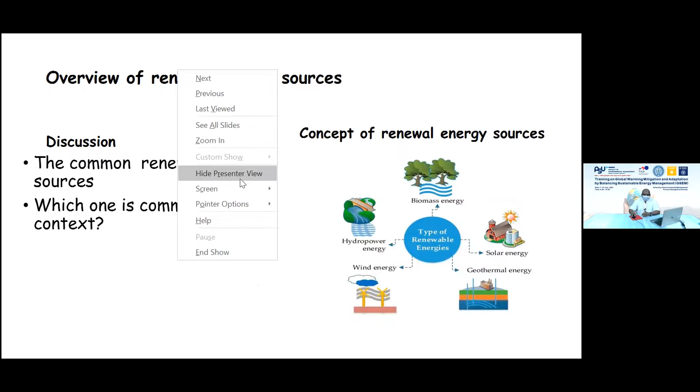Particularly, we will be talking about biomass energy here. Basically, in a broader sense, what we have as renewable energy sources are biomass, solar energy, geothermal, wind, and hydropower. There are other conventional ones that just belong into either of these. But in a nutshell, these are the common ones, just to refresh our mind. Our focus is talking about biomass.

Now, biomass - the concept of biomass is around this. The different biomass sources by concept actually cover, when you think of biomass, when you are talking about biomass, you are actually referring to one or all of this that makes up the concept of biomass.

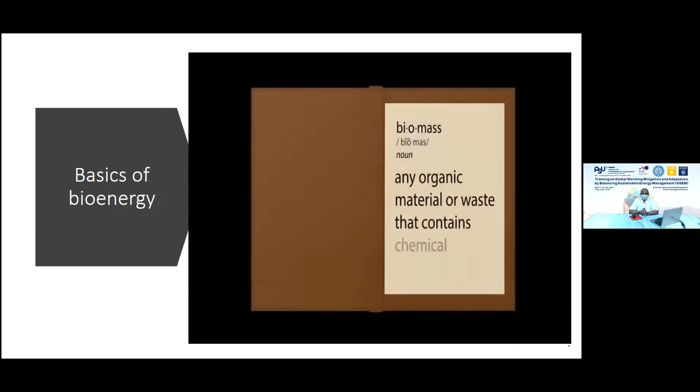Biomass sounds complicated, but really it's simple. Biomass can be defined as any organic material or waste that contains chemical building blocks like carbon, hydrogen, and other components vital to our modern energy and materials economy. Biomass is the single largest supply of carbon on planet Earth and is a sustainable, renewable source for products currently made from petroleum. Here's how it goes from waste to watts: trees and plants absorb energy from the sun through photosynthesis.

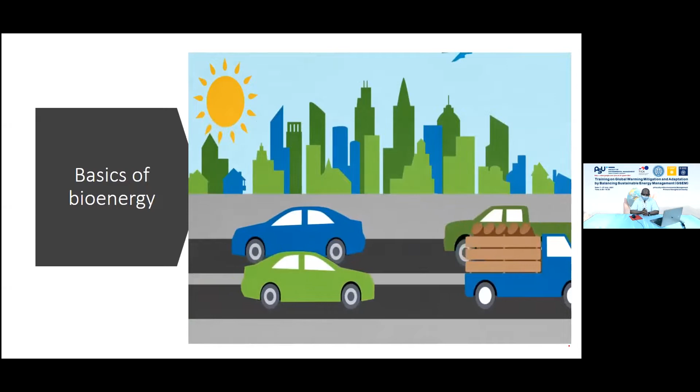There are several ways to convert biomass into usable energy. It can even be turned into fuels to power cars, trucks, and airplanes. To make fuels, wood is converted first to an intermediary gas or liquid that can be upgraded to make a final product such as gasoline, diesel, and jet fuel. It's almost like putting a tree trunk in your gasoline tank.

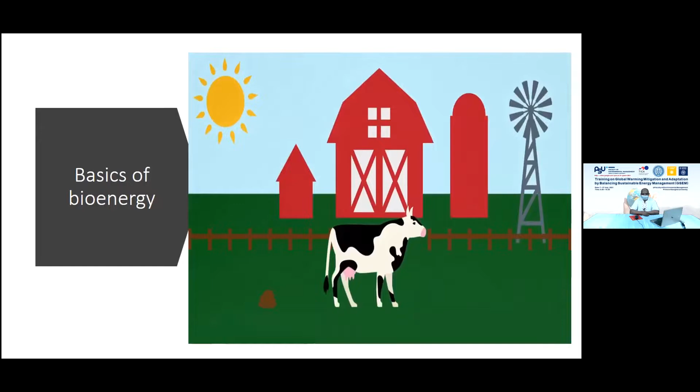Biomass also includes wastes - there are processes that work for many types of waste biomass, like animal waste. That's right, poop - believe it or not, poop can be used to make electricity. Manure from farm animals, mostly cows, is put into a big tank called a digester. Like your own gut, a digester has bacteria that eats waste and turns it into methane gas. The methane is burned to heat water, the hot water produces steam, the steam creates pressure that spins a rotor inside a turbine, and the turbine powers a generator, which produces electricity.

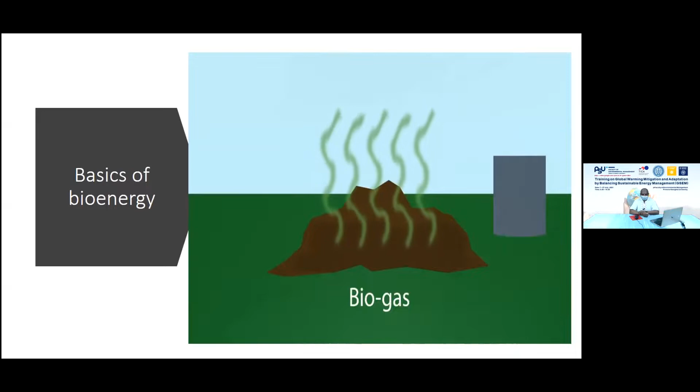That's it. Methane can also be captured from landfills. When biomass decomposes, it emits a gaseous product called biogas, which is rich in methane. After some cleanup and upgrading, the methane gas can be captured and burned in the same process to make electricity or to heat your home and cook your food. Biomass can also be used to make products like polymers and plastics made from renewable sources of carbon that are either recyclable or biodegradable - this will help solve the problem of plastic waste. Yes, biomass isn't so glamorous, but it is a clean, renewable source of energy and materials essential to our modern society. Who knew waste could be a powerhouse?

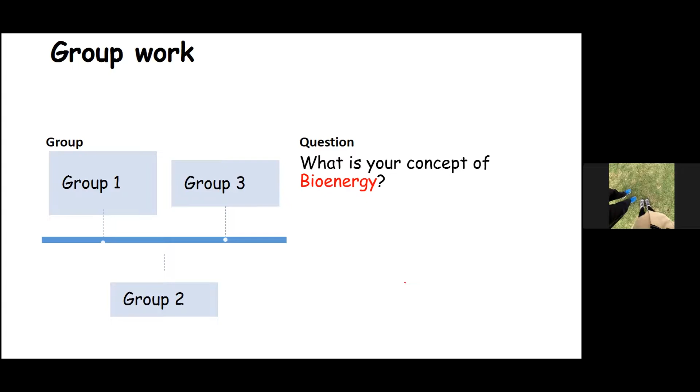Yes, from my understanding, from my practice and my work, sir, I understand bioenergy simply as energy produced from highly carbonaceous material, and when these highly carbonaceous components have already degraded, the output can be any gas like methane. This can be used to power any mechanism to produce energy like heat or steam. Okay, that's all right.

Thank you very much. The second concept I want us to discuss—because putting this together will help us know and connect a lot of things about biomass and energy—is, how about biofuels? What's your own concept of biofuels?

Biofuels? Hello? Sir, biofuels will be things like ethanol and stuff we produce from sugarcane.

Okay, for clarification, whatever fuel—when we talk about biofuel, we're talking about the product or produce from the bioenergy in terms of the waste. When you see waste, or see an animal in Guyana defecate or mess with the waste from an animal, you look at it as something scornful, something you shouldn't be around. Whereas that is something that could actually be used to produce a form of bioenergy. The product from that I would consider, and I might be open on this, to fall under the biofuel category to an extent.

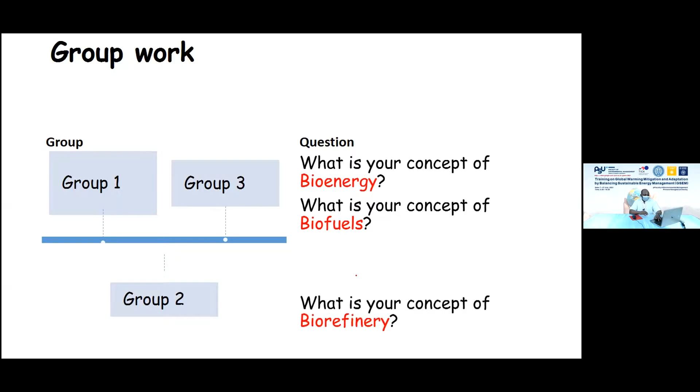Okay, and then thirdly, we want to talk about this. How about this? Yep, who is there? Anybody there? Biorefinery. Somebody is saying, wow, what about that? Hello? Yes sir, yes, yeah.

I think biorefinery is a place or a process to produce bioenergy. It can be from biofuel, maybe, and the byproducts integrated in one place. Oh, great, integrated in one place. Thank you, that is the keyword there.

Yes, anybody? Yes sir, this is Emeline. Okay, Emeline from the Philippines. Biorefinery is a facility where there is conversion of biomass into energy. It's just a facility for this energy conversion.

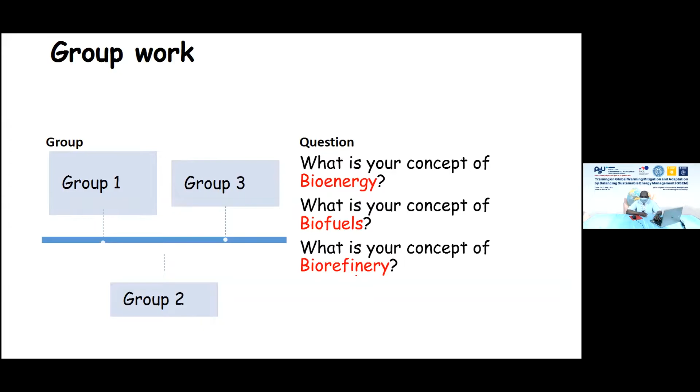Yeah, that is that. Can we have another person? Anybody with a different perception, not contrary? Anybody? Okay, let's move on from here.

Actually, this is what we are to do. From all that they said, submissions from Michael, Emmeline, and other people, I want to know from their submission who you think is wrong. Who was wrong? No one. What do you mean? There is no one wrong. In this scenario, it's just how we see it, right?

So there is no cause for us to be arguing that this is this and that is that. It's just the way it appeared to you. There is always a meeting point, always a common ground and a base for all our perceptions.

Among these people, who is wrong? Anybody wrong? Okay, so in reality, reality can be so complex that equally valid observations from different perspectives can appear to be contradictory. That is how life is. This is just to energize us and let us know that your opinion or perception should be respected, and others should be respected too, depending on where they are standing, their direction, and whatever, in life generally.

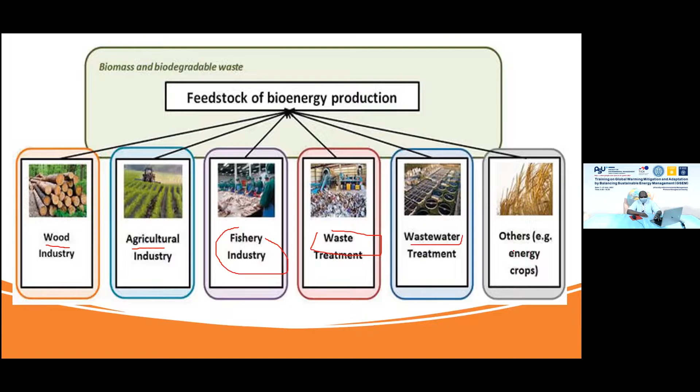And there are some specific crops they call energy crops. Naturally, they have been made to conserve energy in many of their storing parts, and they are specifically referred to as energy crops. Okay, this is where we get our feedstock from.

We've already discussed these things, so this is just a review. Talking about biofuels, to some, it's simply fuel from biomass, whatever you consider fuel to be. The one you get from biomass is a biofuel. Another school of thought says it's a fuel produced through a contemporary process from biomass.

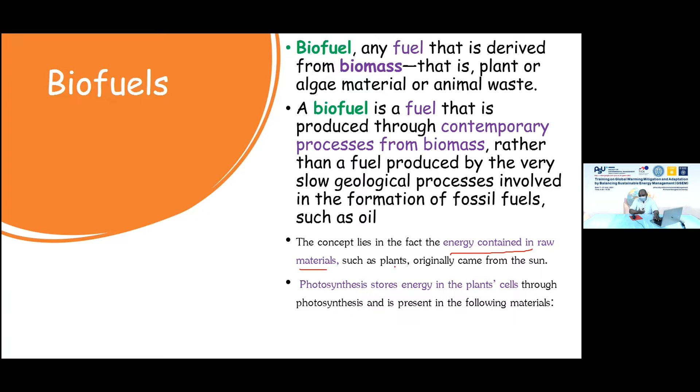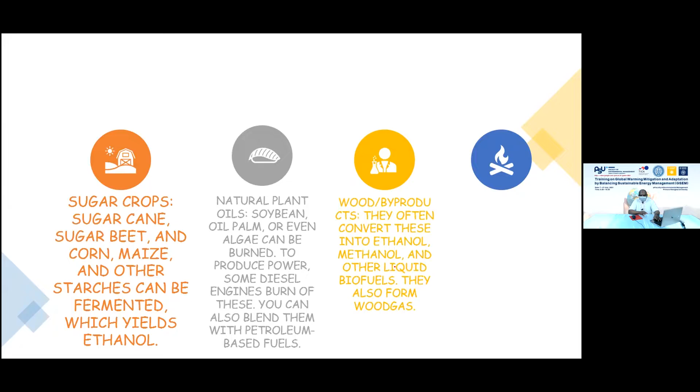So these are different sources of biofuels. Sugar crops - sugar cane, sugar beet, corn, maize, and other starches - can be fermented into ethanol. Oil seeds, oil plants, and oil crops can also be burned to produce power; some diesel engines burn through this. And wood is also a kind of source of biofuel.

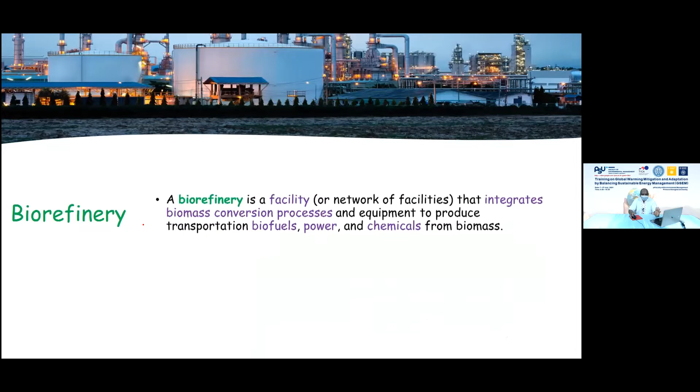Biorefinery, on the other hand - I'll quickly run through this, as someone already mentioned it in our class. A biorefinery is a facility that integrates biomass conversion processes to produce fuels, power, and chemicals.

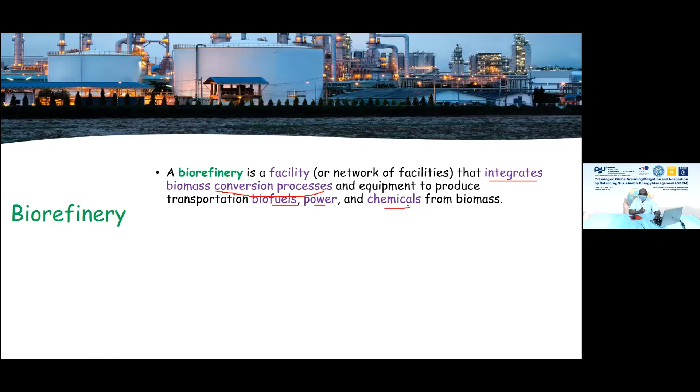The main concept of a biorefinery is just like a petroleum refinery. Some of us are familiar with what happens in a petroleum refinery, where a range of products are produced - the same principle happens in a biorefinery.

According to the International Energy Agency, a biorefinery is sustainable biomass processing. We've already discussed what sustainability is about in previous sessions when defining sustainable development. So in this case, it's sustainable biomass processing that yields a range of products, not only energy-related ones but also biomaterials - a broader picture of what a biorefinery can be, along with the bioenergy products we've already mentioned.

So that is that about a biorefinery at that point, but then in a follow-up, this is what it means.

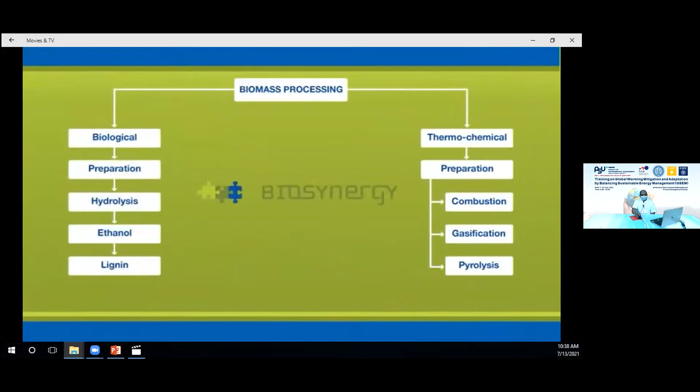There are two main routes when it comes to processing biomass, either biological or thermochemical. These processes are at the core of the Biosynergy project, which the European Commission has sponsored. The biological process firstly involves pre-treatment, in which the biomass is received, handled, stored, dried, and reduced in size.

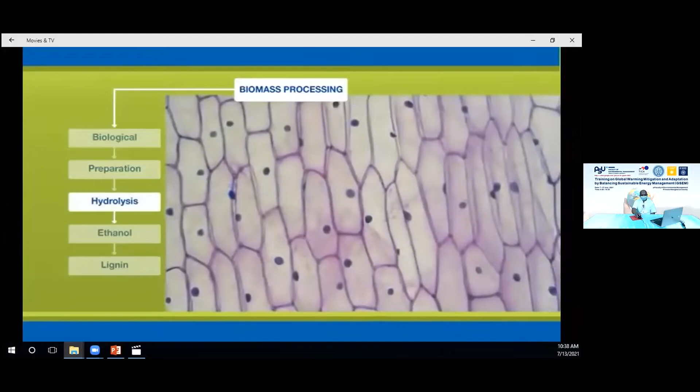Next, hemicellulose and cellulose are converted by a process of hydrolysis using acid or enzymes. This creates sugars, which are fermented to produce a dilute product from which ethanol is separated. The ethanol produced can then be used as a fuel in its own right, a fuel additive, an industrial solvent, or processed as a petrochemical to produce other specialty and commodity chemicals, which can be used to make a wide range of consumer products. A byproduct of hydrolysis is lignin, which is used in the production of transport fuels and specialty and commodity chemicals.

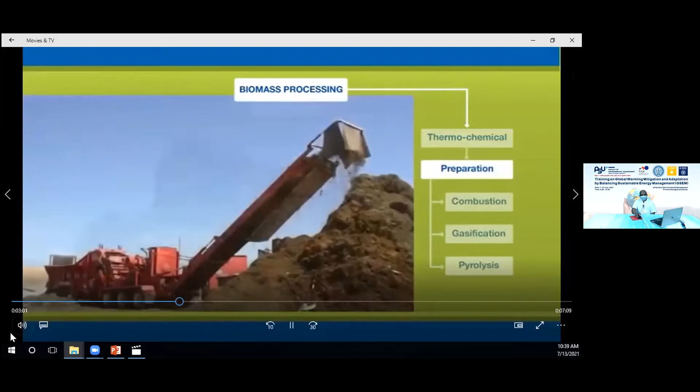The thermochemical processing is different in that high temperatures are involved, but again involves pre-treatment in which the biomass is received, handled, stored, dried, and reduced in size. It then goes through one of three different types of thermochemical processing: combustion, gasification, or pyrolysis. Combustion is used to generate heat, which produces steam, and this in turn drives turbines to generate power.

Gasification turns biomass into fuel gas or synthesis gas. Fuel gas is used to generate power and heating, while synthesis gas is used to manufacture synthetic transport fuels and bulk chemicals, which can then be refined to produce specialty chemicals, such as polymers used in the manufacture of consumer goods.

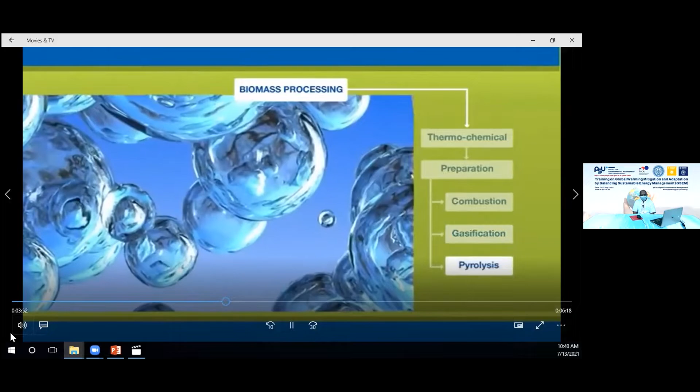Pyrolysis encompasses a number of varying processes. Fast pyrolysis produces high yields of a high-energy liquid that is cost-efficient to handle and transport. This can be used directly for heat and power, or to produce chemicals such as adhesive resins for wood panels. It can also be processed further by gasification.

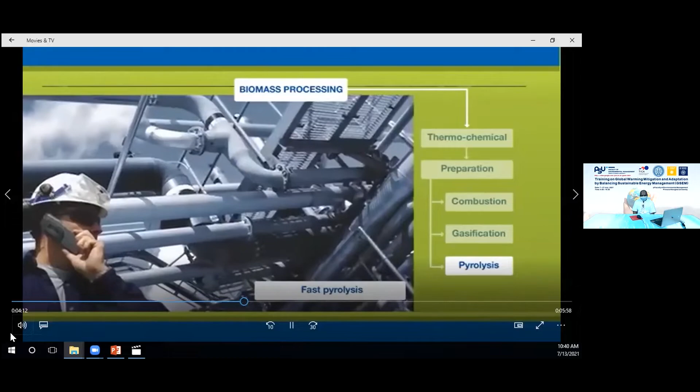Low-temperature pyrolysis, or torrefaction, also prepares biomass for gasification and improves its quality. Various other forms of pyrolysis, intermediate and slow pyrolysis, also produce gas, liquids and solid that can be used in analogous applications such as acetic acid.

So, what do these conversion and upgrading processes actually produce? For a start, they produce heat and power, either for industrial and domestic use, or for use in the biomass conversion and upgrading processes.

Secondly, they produce transport fuels, either by blending bioethanol with fuel, or using it as a fuel in its own right, or by using hydrocarbons to produce synthetic diesel and gasoline. Thirdly, they produce specialty and commodity chemicals which can be used to manufacture a wide range of products for use in industry and ultimately in consumer goods.

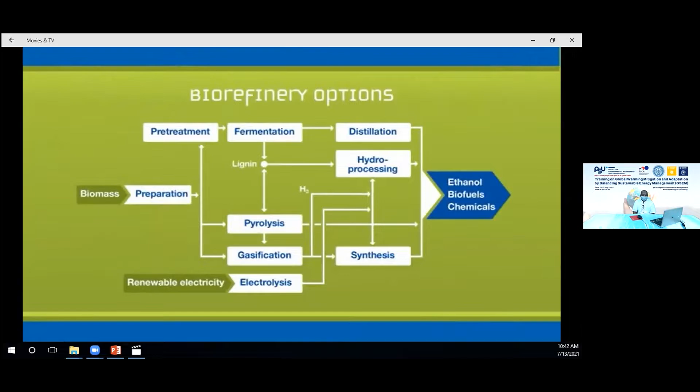It's essential that we get the most effective output from processing biomass. And to achieve this, we need to look at integrating the biomass processes in order to optimize the range of products they generate. In essence, this means developing integrated biorefineries capable of producing a similar range of products to those produced by conventional petrochemical refineries.

The concepts we develop for biorefineries also need to be as cost competitive as possible, and this can be achieved by using as much of the biomass as possible. One aim is a design for an integrated lignocellulose biorefinery based on the straw-based bioethanol demonstration plant of Abengoa Bioenergy in Salamanca, Spain. An example is provided in this diagram.

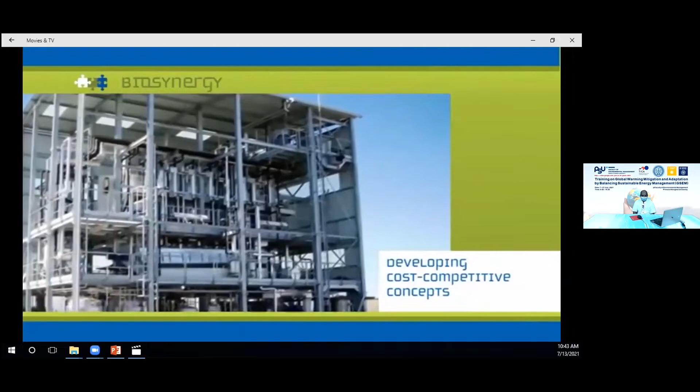At present, we are evaluating 5 different methods of straw pre-treatment for the production of fermentable sugars, each differing in performance and cost. The optimal process will depend on the processing destination of the fractions and the envisaged end products.

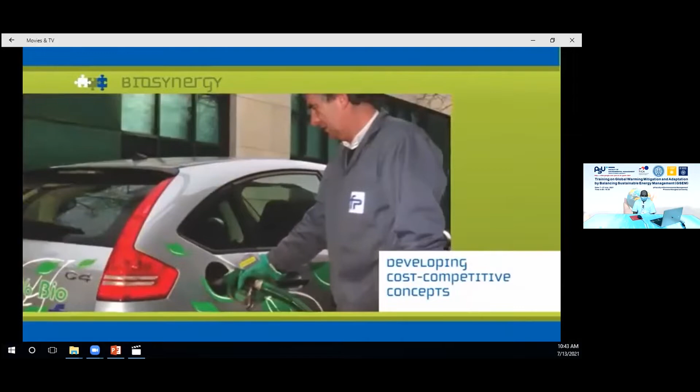As well as producing ethanol by fermentation, we are also investigating other biochemical processes that produce acetone, butanol, and other platform chemicals. Another idea is the development of thermochemical conversion integrated with separation technologies.

For example, thermal conversion by gasification produces synthesis gas, which can be converted into ethanol, methanol, diesel, and gasoline. Thermal conversion by pyrolysis produces a liquid oil, which can be used as an energy carrier that can be upgraded into refinery feedstock material for the production of transport fuels, and can be used as a source of commodity and specialty chemicals.

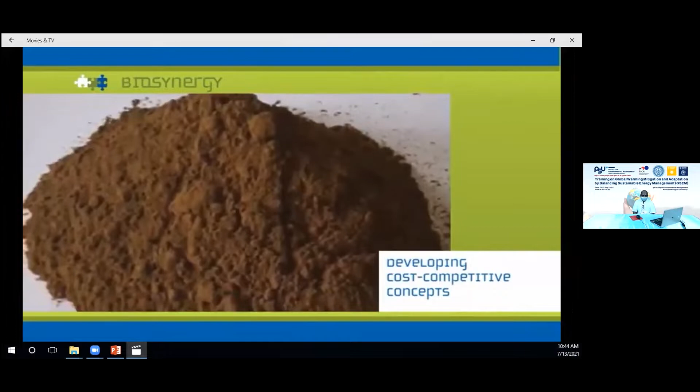A key byproduct from bioethanol production is lignin, and we are investigating this as a feedstock for resins and phenol for polymer synthesis, while potential chemicals from the hemicellulose fraction include surfactants and furfural.

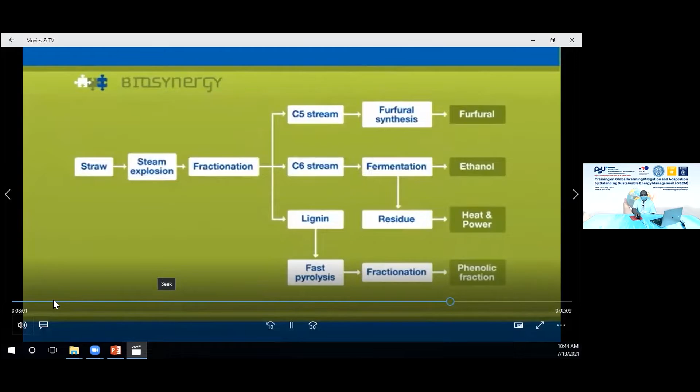At present, we are evaluating all these process concepts in order to identify the most promising biorefinery chains in terms of performance, energy efficiency, environmental performance, cost, and socio-economic contributions. This will entail several of the best performing biorefinery processes being tested at pilot plant scale.

It all sounds workable. But there are a number of challenges ahead if we are to seriously consider biomass as a sustainable energy source for the future.

For example, where do we source biomass without damaging local economies and areas set aside for food production and feedstock? How do we reduce processing costs? And how do we integrate products into the supply chain and get them to consumers?

How do we go about producing multiple products, making the whole process more cost efficient? And what is the overall life cycle impact, taking into account use of land, cost of processing, the carbon footprint, and the socio-economic benefits?

These are the challenges Biosynergy needs to overcome if we are to optimize the range of products that can be derived from a biorefinery and provide future generations with a viable and sustainable biomass resource.

The Biosynergy Consortium consists of 17 complementary partners with a high level of expertise.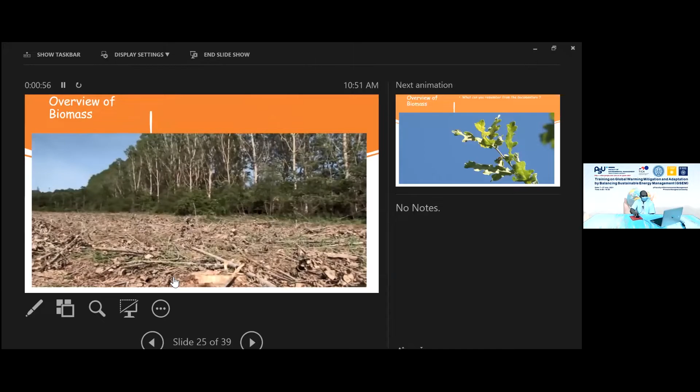Biomass is essential to human beings. For thousands of years, people have used biomass as a source of energy.

In the 20th century, oil has made life easier. But the negative side is that nature, or the environment, is seriously affected.

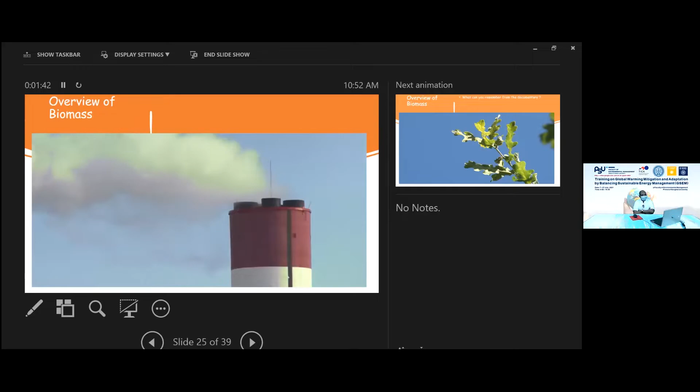Would the solution today consist in reverting back to basic energies, such as the sun and biomass? And if we do this, what would the cost be?

Recent technologies can convert biomass into hydrocarbon within a few hours. The willingness to change is therefore mainly a matter of commitment.

To what extent can biomass replace fossil fuels? What are the benefits for the environment, for society, for climate change?

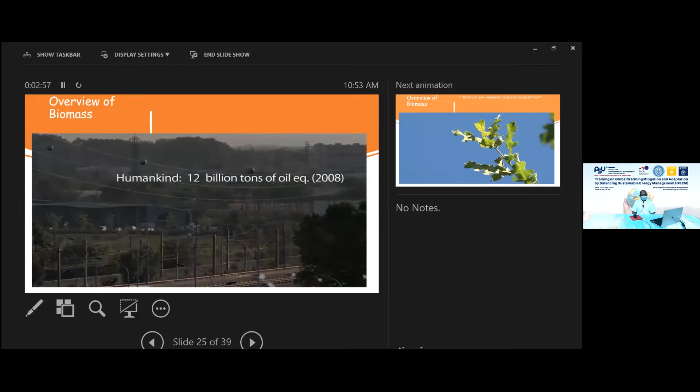In one year, humankind consumes the equivalent of 12 billion tons of oil. In one year, the solar energy received by the Earth is equivalent to 90,000 billion tons of oil, and the energy stored in biomass growth amounts to 72 billion tons. All the energy needs of humankind in a year could be met by collecting an hour of sunlight, or one sixth of the biomass production. Yet renewable energies only account for 13% of the global energy package, which is dominated by non-renewable energies: oil, coal, gas, and nuclear power. Biomass is number one, far ahead of hydropower, wind, solar energy, geothermal, and tidal power together.

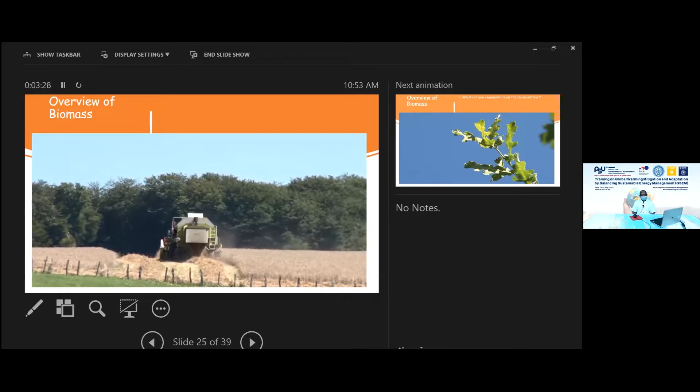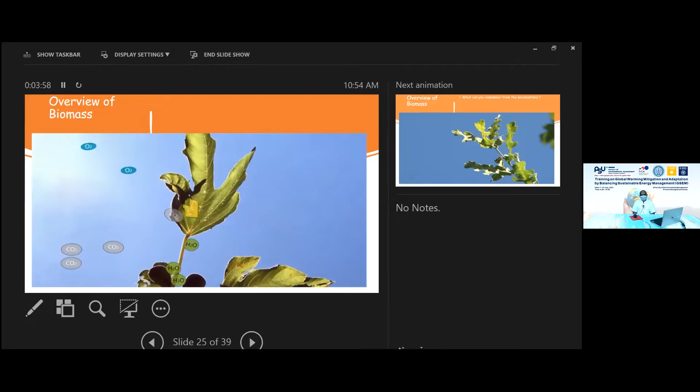Biomass, which is at the beginning of the food chain, is also at the beginning of the energy chain. Photosynthesis is a biological process that enables plants to synthesize their own organic matter from atmospheric carbon dioxide, CO2, and water. Photosynthesis mainly produces sugars. For example, 6 CO2 molecules and 6 water molecules are needed to produce 1 molecule of glucose. The reaction also produces 6 molecules of oxygen.

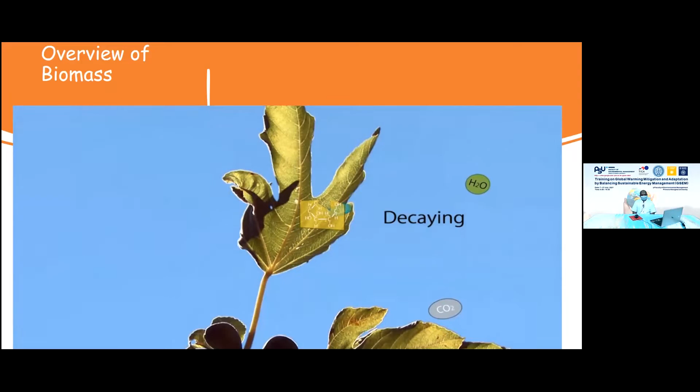CO2, mainly responsible for the greenhouse effect, is thus trapped in solid form within the organic matter, except for the loss in organic matter due to breathing. Growth only occurs if the amount of organic matter produced by photosynthesis exceeds the amount needed for breathing. At night, only breathing takes place. Lastly, plant decay in the open air obeys the same law as that of breathing.

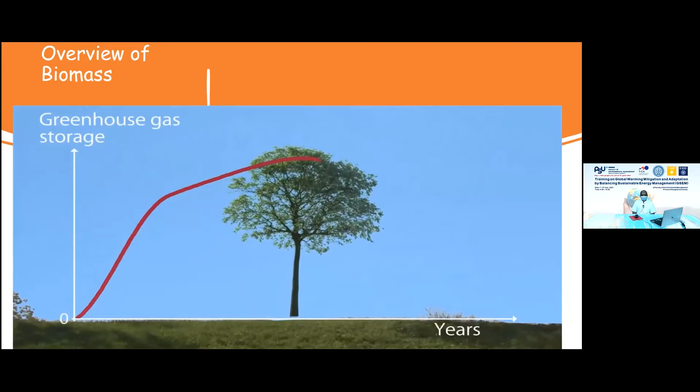Now let's have a look at the life cycle of a tree. The young tree stores more and more carbon. As it grows older, its breathing catches up with its synthesis of organic matter. Consequently, carbon storage declines. The tree dies. As it decomposes, it releases all the carbon it will have stored in its lifetime. It is therefore a carbon sink and a source of carbon. Over its whole life, the net result is zero.

The tree has stored or produced no carbon, and it has not stored or produced oxygen either. In order to limit the greenhouse effect by stocking a maximum amount of carbon, there is thus an optimum age at which the tree should be cut down and replaced with a sapling.

If the tree is burned instead of being allowed to decay, we find the same result, but the reaction is faster. If this decay takes place in the absence of oxygen, for instance in a rainforest swamp, the tree will produce methane. Methane is a much more powerful greenhouse gas than CO2. So in its whole life cycle, the impact of this tree will have been negative because it has produced greenhouse gases.

By playing a part in natural systems, humankind can therefore control the reabsorption of atmospheric CO2 and limit the emission of greenhouse gases.

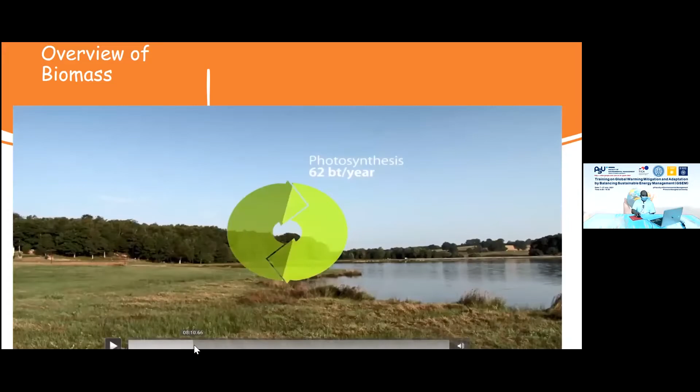Not included in official statistics, on a global scale, the carbon flow stocked by biomass is about 62 billion tons a year. This carbon is considered as circulating because a major part of it goes back into the atmosphere due to the decay of biomass. Photosynthesis is the driving force of this carbon cycle.

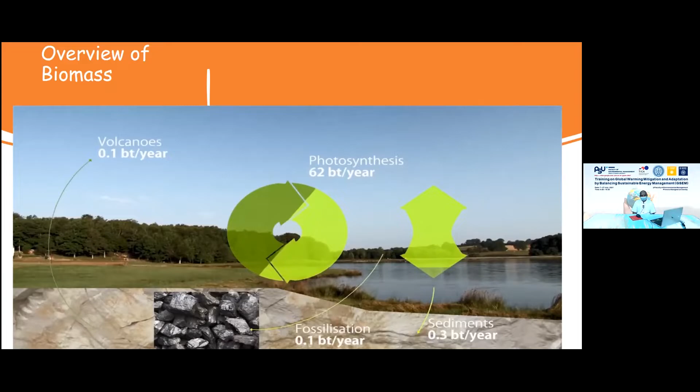Related to this main cycle, there are other lesser ones. Atmospheric carbon is in balance with the carbon dissolved in water. Part of this dissolved carbon sediments, while sedimentary limestone is burned by volcanoes and returns to the atmosphere. Finally, a tiny fraction of biomass will be gradually fossilized, but it will require millions of years for this biomass to be turned into coal, oil, and natural gas.

From the industrial era onwards, in the 1850s, human beings began to draw from fossil fuels. The burning of these resources provoked additional CO2 emission into the atmosphere. Deforestation and the use of limestone, for example for the manufacturing of cement, also generate CO2 emission into the atmosphere. Humankind thus releases a new source of CO2 called anthropogenic CO2.

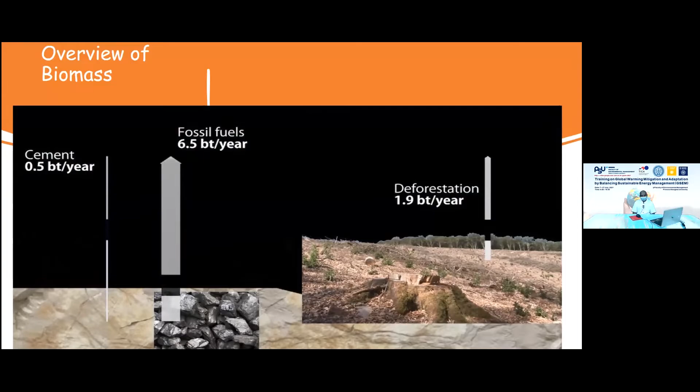This flow of carbon released into the atmosphere brings about an imbalance because it is too large to be absorbed by natural phenomena. Thus, the concentration of atmospheric carbon that had been stable for years has been increasing since the first industrial revolution. This has increased and continues to increase the greenhouse effect.

By capturing and releasing CO2, the plant creates a flow of carbon. The whole biomass is a stock of carbon. The flow and the stock are related. On Earth, the carbon stock is divided between 4 reservoirs.

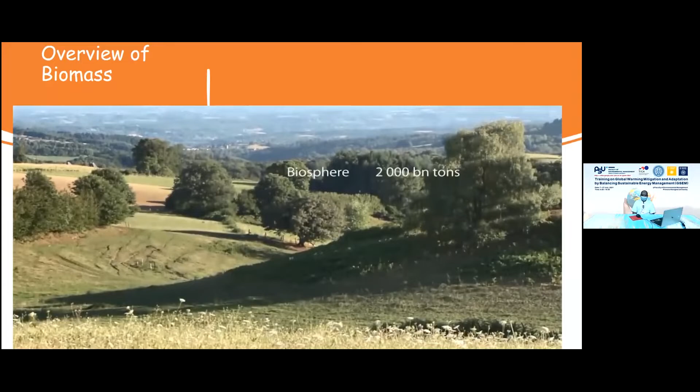The atmosphere: 750 billion tons of carbon, mainly in the form of carbon dioxide. The biosphere, which represents the organic carbon of biomass: one quarter of it is alive, and three quarters is dead or decaying. The hydrosphere, water, contains dissolved carbon. The lithosphere, the underground rocks, contains most of the carbon as a mineral.

There are rocks of organic origin—coal, oil, and natural gas—called fossil fuels, all created by the fossilization of biomass. There are also limestone rocks, formed by the sedimentation of shells and the precipitation of dissolved carbon. The amount of carbon that can still be released into the atmosphere is enormous.

Populations are not equal with respect to their energy consumption. There are large consumers, who consume 10 times more than small consumers, and there are average consumers. Of course, the larger consumers could consume less, but they are very few.

In fact, areas where energy consumption per person is the lowest are the most populated, have the strongest population growth, and have the highest increase in energy consumption. But these consumers consume so little that it is difficult to ask them to consume less. So even with a balanced consumption of around 2.2 tons of oil per person per year, more energy will have to be produced, all the more so as the world population keeps increasing.

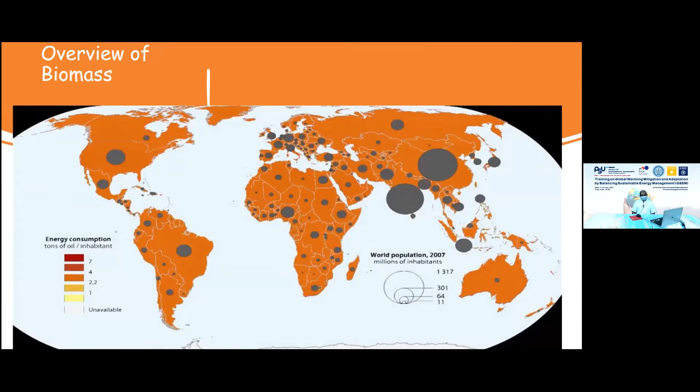In order to achieve sustainable energy consumption, energy production should not resort to using energy stocks, but to using energy flows. We should no longer draw on fossil fuels or trees, but capture rather solar energy, wind energy, or the flow of biomass production instead. We must use energies that are able to be renewed as fast as we consume them, that is, renewable energies.

The use of biomass consists in diverting part of the cyclic carbon towards human activity. Once consumed, this carbon returns to the cycle it would have had if humans had not intervened, that is to say, there is no further emission into the atmosphere. On the contrary, what is taken from the biomass saves fossil fuels and accordingly reduces emission into the atmosphere.

But biomass production, transformation, and transportation have an energy cost. The economy in greenhouse gas should then be calculated over the entire cycle. Shortened circuits that already exist in the food economy also have a part to play in energy production.

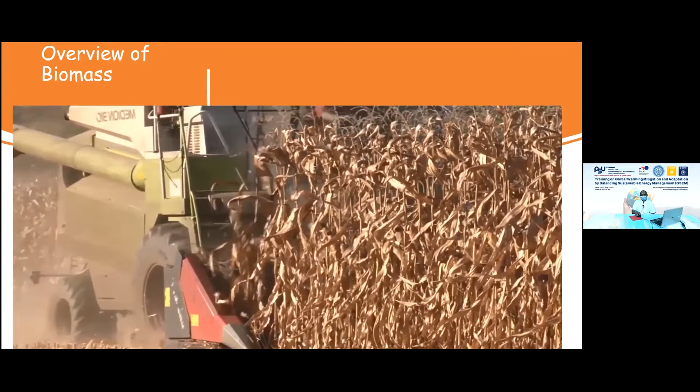Before 2008, easily transformable substrates were used, often foodstuff, sugar and vegetable oil, in order to obtain ethanol and methyl esters. These were the first-generation biofuels. In 2008, the food shortage broke out. It emphasized the awareness that non-food biomass should be used to produce biofuels.

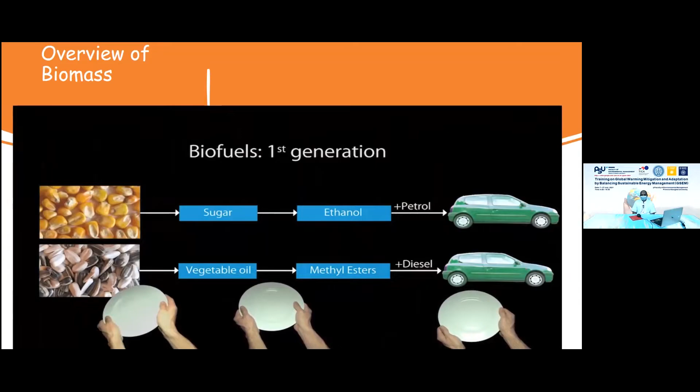These were the second-generation biofuels. The second-generation biofuels used lignocellulose as a raw material. Lignocellulose is the main component of plants. Its transformation thus enables us to use entire plants rather than storage organs alone.

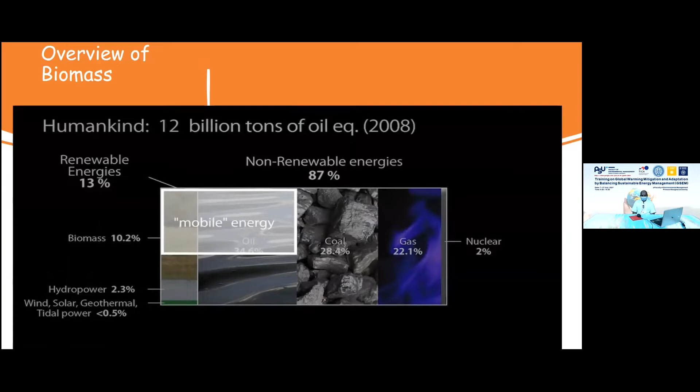The nature of the energy produced depends on the use we want to make of it. We distinguish static use from mobile use. Static use energy is consumed in a fixed place. Mobile use energy is employed to move vehicles. Only a third of the energy is used for mobile use, but it is the most problematic energy because it has to be carried within the vehicle. The main constraint is to go far with a low volume of fuel.

A lot of renewable energy is produced in the form of heat and electricity. It is difficult to store heat and electricity. Therefore, they are mainly used for static use. The characteristic of biomass is that it is available in a material form, which gives it the advantage of being easily stored.

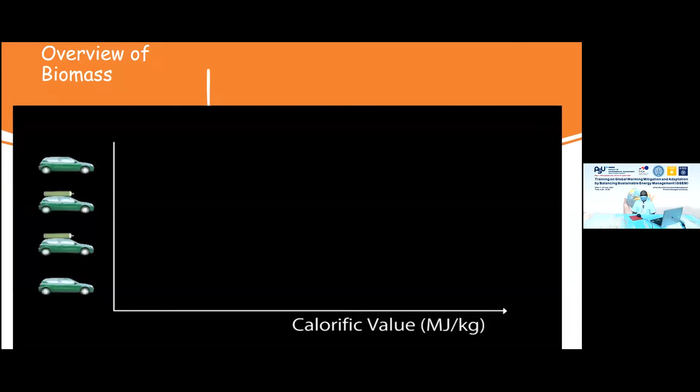Among the energies that can be easily stored, thus offering the strongest energy content, what we call calorific value, are preferable. The higher the calorific value is, the further we can go. Biomass, wood, has a low calorific value, 16 megajoules per kilo. Besides, the solid form of wood is ill-adapted to power an engine.

Gases are used as mobile use energy, methane and hydrogen. They have a very high energy content. But the storage of these gases is still cumbersome and eventually limits vehicle autonomy. Yet hydrogen would be an ideal fuel because its combustion does not release CO2. Enriched uranium has a calorific value of about 500,000 megajoules per kilo. A kilogram of uranium would allow a car to run 200,000 kilometers.

But in civilian life, the best adapted energy for mobility is thus in a liquid form. It is then called fuel, and biofuel when the resource is biosourced and not a fossil fuel. Liquid biofuels are already part of everyday life. Ethanol is mixed with petrol. Pure vegetable oil is also used.

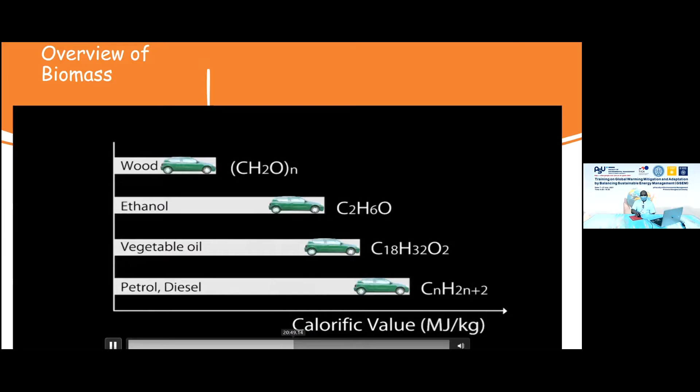But petrol and diesel, with a calorific value of 43 megajoules per kilo, surpasses all liquid fuels. The fuels with the highest calorific value contain the least oxidized molecules, i.e., those with the lowest proportions of oxygen. Petrol and diesel do not contain oxygen atoms, but only hydrogen and carbon atoms. They are hydrocarbons.

It has taken nature millions of years to produce hydrocarbons. Are we able to do that successfully in a few hours?

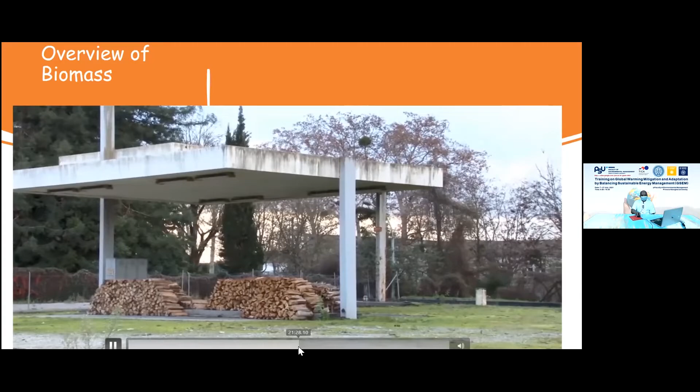Biomass is a complex entanglement of macromolecules. Thousands of glucose molecules are bound together in linear chains to form a molecule of cellulose. Cellulose forms cable-like filaments known as fibrils. Lignin is like a corset that stiffens the cellulose network and brings solidity and impermeability to vegetable cells.

Hemicellulose binds cellulose molecules and lignin. This structure makes biomass highly resistant.

This is the difficulty with second-generation biofuels: how can we deconstruct lignocellulose to obtain simple molecules that could be used by traditional chemistry? The stakes are of the utmost importance.

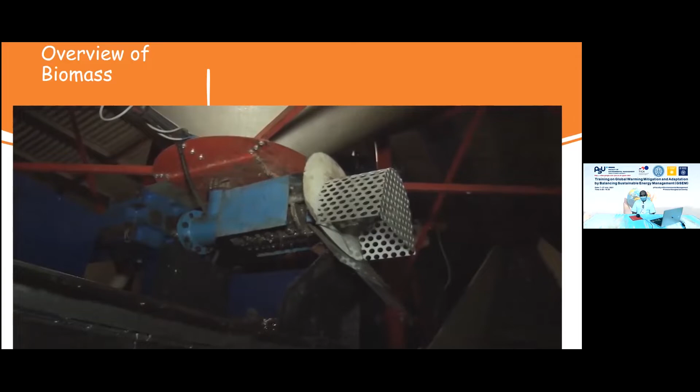In the first-generation processes, simple cold pressing would enable us to extract sugar or oil. The second-generation processes are far more complicated. We distinguish microbial methods from thermal methods.

After chemical treatment, the microbial methods use enzymes which selectively split up macromolecules into simple sugars. Among other things, we can collect the glucose molecules from the cellulose. The thermal methods, which are more drastic, pulverize all the lignocellulose macromolecules into simple molecules, hydrogen and carbon monoxide.

Nowadays, technologies have improved and allow us to use the byproducts of agriculture as well as the products and byproducts of forestry. This resource, rich in lignocellulose, led to the second-generation biofuels.

The cultivation of microalgae has led to third-generation biofuels. Microalgae produces sugars and oils with yields per hectare that could be 10 times as high as those of land crops. These techniques are quite recent, and their industrialization is still in progress.

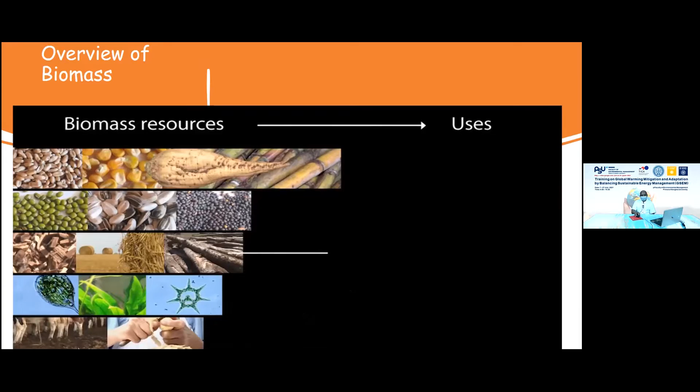Lastly, there is the issue of waste. Wet waste can be methanized to obtain biogas and provide gas, heat, and electricity for the energy networks. Dry residues, in the form of lignocellulose, enable us to produce biofuels. Burning wood allows us to proceed directly from the energy resource to the energy use, heat.

But generally, a transformation process is needed to convert the resource into a specific energy use. It is in the biorefineries that this transformation takes place. If we consider mobile use, the most favorable solutions of the moment are found in second-generation biofuels.

We estimate that, compared to fossil fuels, first-generation biofuels reduce greenhouse gases by 30%. Second-generation biofuels reduce them by between 70 to 90%. This reduced impact is because these resources already exist.

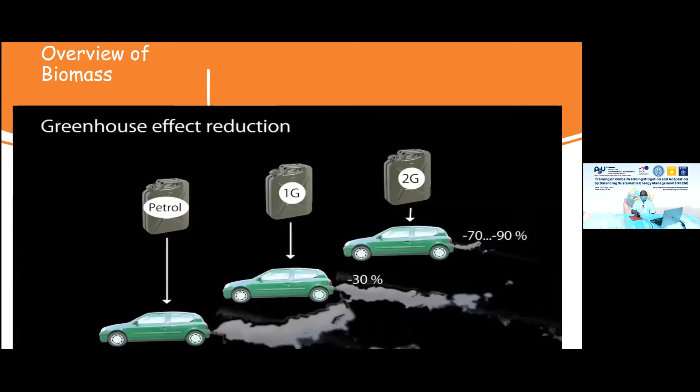Often, all we have to do is harvest them. But to launch an industry, raw materials must not only be available in sufficient quantity, but must also be sustainable. Is this the case?

Around the globe, land areas represent 14.9 billion hectares. 10% of this surface is occupied by farmland, 23% is pasture, 26% is forest. Everything else is desert or built-up areas. This means that biomass covers about 60% of the land.

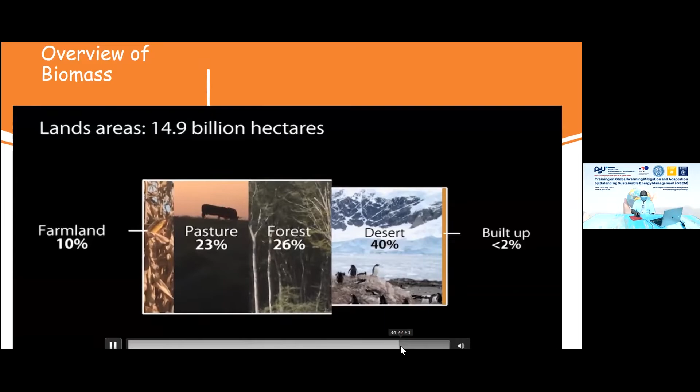Yet plants don't grow everywhere at the same speed. We can assess these differences by measuring the net primary production. It is the mass of organic matter synthesized per square meter and per year.

On land, organic matter develops 5 times faster in tropical areas than in temperate areas. The net primary production varies according to a series of factors, including light intensity, water, temperature, and the concentration of CO2. We could almost say that thanks to the CO2 released by humankind, plants grow faster.

Let's take the example of forests. They produce per hectare and per year 2 cubic meters in the far north, from 5 to 20 cubic meters in temperate and dry tropical areas, from 50 to 100 cubic meters in wet tropical areas.

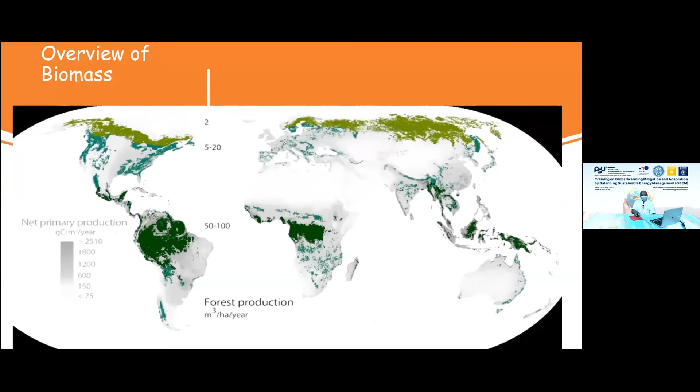Currently, the average rate of wood harvesting is 1 cubic meter per hectare per year. Let's imagine that we took 2 cubic meters instead of 1 cubic meter. This alone would correspond to 8% of humankind's energy consumption.

In particular, unused wood debris left to rot in forests already represents 60% of the available biomass. In the countries where forests are managed, they are expanding without fertilizer and without irrigation.

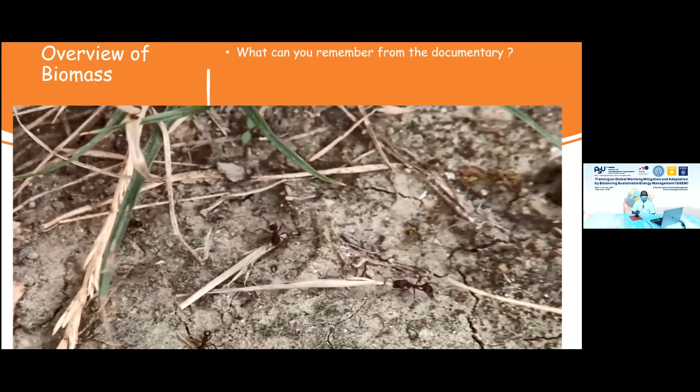Autonomy. The same is true for food autonomy. Solutions have to be found. Researchers are working on them. But it is a global social project that must be set in motion. We have to reconcile the natural advantages offered by the soil, climate, and location with biodiversity and employment. This is necessary to provide humankind with sustainable sources of food, material, and energy.

Okay. Yeah. Can you hear me there? Yes, sir. We've had a long watching and listening and all that. So please, for us to be able to grasp and get some things from what we've been hearing, can we respond to this quickly?

What can you remember from the documentaries about biomass energy and biofuels? In one word? Yes, please, go ahead. I just want to mention what is something new from the documentary.

Actually, I haven't had the idea about the life cycle of the tree in terms of carbon dioxide. It was new to me that it is better to cut the tree before it decays, when it gets older, so that the carbon dioxide won't be going back to the atmosphere.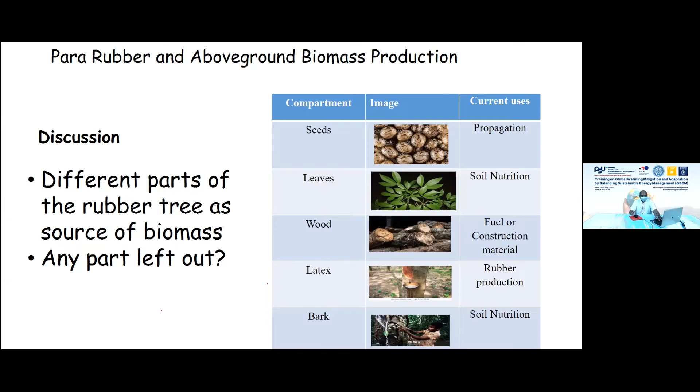But I will try to show us also a kind of prototype of what happens there, that energy can be generated from biomass. In this particular case, they use the rubber stump, the stump after the rubber tree has finished yielding latex around the age of 25 to 30 years old.

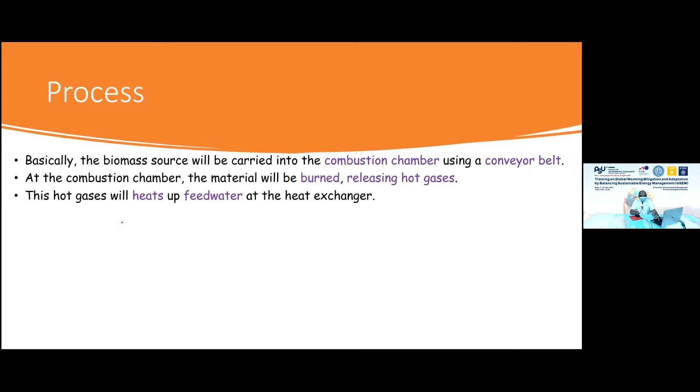So at the combustion chamber, what happens there? There is a burning of the stock, the feedstock, releasing hot gases. These gases now heat up the water, and then the gases will be treated before being released back into the air.

In their own case, they use a system called ESP to treat the gases being released from here, and other people utilize the ash after the burning in other construction materials, concrete mix, and all that. So they try to make the system in this plant sustainable and circular in nature.

Okay, eventually, the process involves energy changing from one form to another. So the solid gains some energy, it goes to liquid. From liquid, when there is more energy, the state of matter changes to gaseous. So when there is gaseous and with addition of energy, it goes to the plasma state.

So this is the same principle that works here. You feed in the solids, generating liquids, and then the liquids go into gaseous state. Then in the process, it comes into plasma in electrical form. So basically these are the main things.

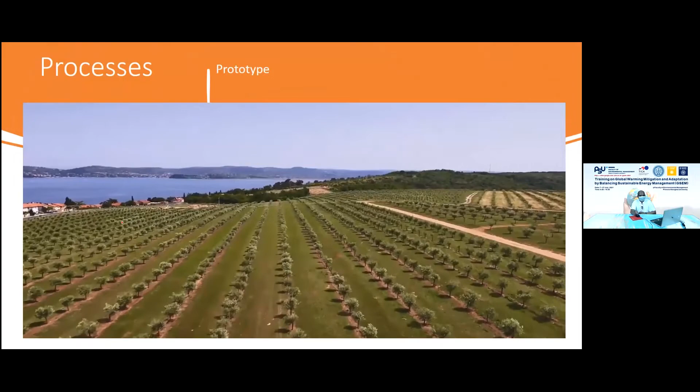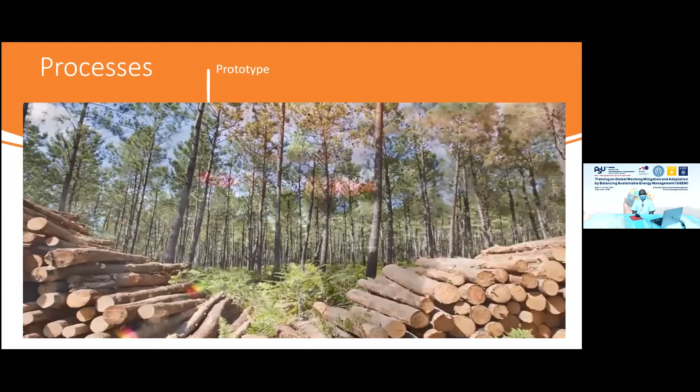A biomass power plant generates electricity using the heat generated by the combustion of organic materials, such as plant residues, household waste, and the biogas resulting from waste fermentation. All of these are renewable energy sources available in large quantities.

The fuel is brought to the boiler. It is then introduced into the combustion chamber where it releases heat as it burns. This in turn heats water in tubes that line the boiler. The hot water is then sent to a tank where it turns into steam. The steam drives a turbine which turns a generator.

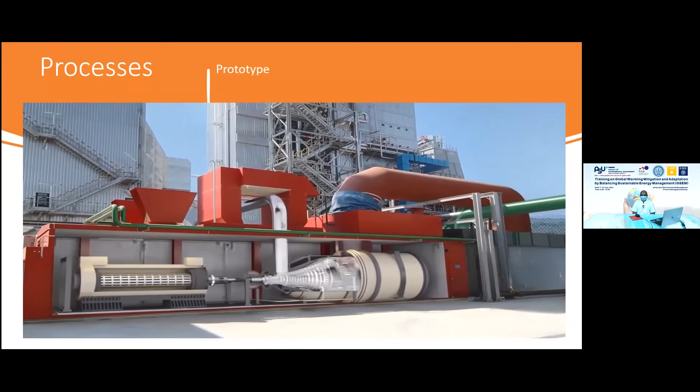In the generator, the interaction between the electromagnets of the moving rotor and the copper coils of the stationary stator produces an electric current. A transformer is used to increase the voltage of this current to 225,000 or 400,000 volts. This makes it easier to transport in the network's very high voltage lines.

The steam leaving the turbine passes through a condenser in which cold water circulates. This cools the steam, turning it back into water. It is then sent back to the boiler. This steam can also be used either for industrial activities or to supply an urban heating network.

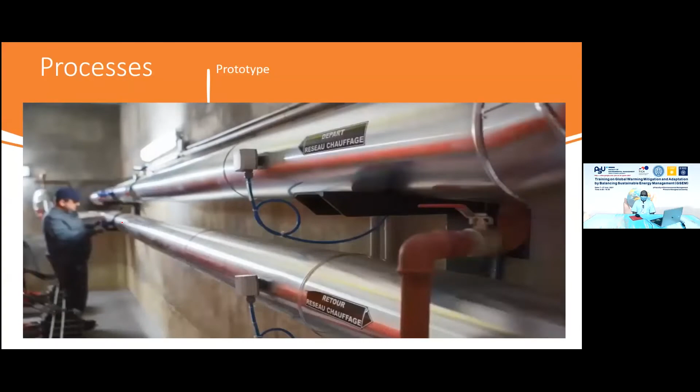This simultaneous production of electricity and heat in a single facility is called combined heat and power. Finally, the fumes released by combustion are filtered before being evacuated through stacks.

Often installed in very close proximity to material production or storage sites, biomass power plants can be used continuously to meet electricity needs whatever the day of the year. They produce regular energy with low CO2 emissions.

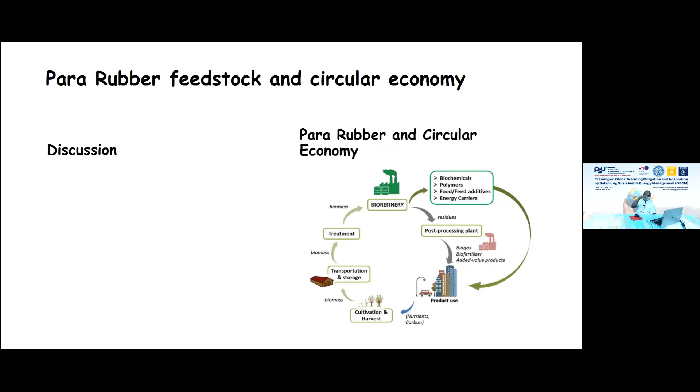Have a closed loop. Okay, it starts somewhere and circulates and returns to the same point. Start somewhere, move somewhere, and then returns to the point, to the starting point. That's a kind of economic system in terms of economy, right?

It is opposing to the linear system of economy. Linear means just harvest, utilize, drop the waste. It is gone. The end of that thing has ended there. But contrary to that, there is another concept called circular economy.

And this is one of those sustainability initiatives or concepts that are being driven all over the world in the economic or development sector, that every nation is clamoring for, to see how they can transit from the linear system of economy to a circular system of economy.

And then for us here, we're already thinking and then strategizing to see what are the things do we have around, because this economic system requires a biological aspect and then the technical aspect. So we've already started in our faculty here, we've started thinking of, okay, what are the biological feedstocks that we have around that is so abundant that can be tied into, that has the capacity to affect or influence any transition into circular economy. So we're trying to look at the circular economy of a rubber tree, the para-rubber.

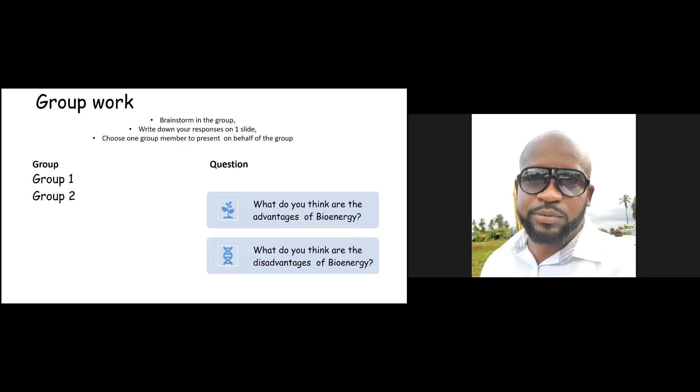Let's talk. First, it's a cleaner form of energy, sir. Okay, clean form of energy, all right, cleanliness, yes. Any other thing? What do you think? People, are you here? Are you with us? Oh, it's already night somewhere. Julie, Rodley, Augustine, are you there? What are the advantages? Hello, sir?

Yes please, I'm here. What are the advantages of bioenergy that we've been discussing? What do you think, is it of any advantage, is it beneficial? Hello sir, yes please, we can hear you, go ahead. I think one of the advantages of bioenergy, aside from using available end products of raw materials, is that it also reduces the effect of greenhouse gases, because the decomposition of these biodegradable materials also adds to the greenhouse gases. Thank you very much for that submission.

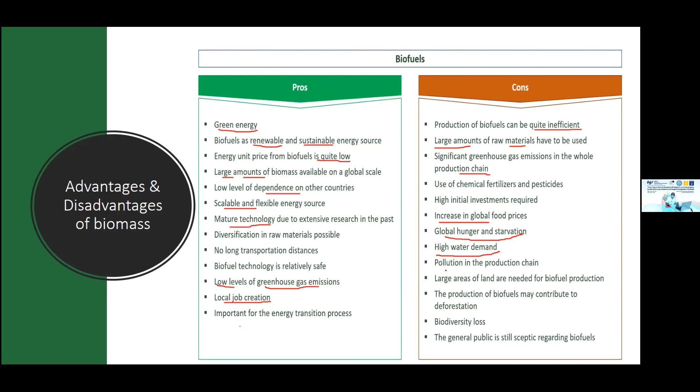Okay, so that is that about the advantages and disadvantages, and then I will quickly run down through what we can conclude from what we've been saying all the while.

Accounting for bioenergy to meet the energy demand and reduce greenhouse emissions, improve soil and water quality, provide economic development, and other socio-economic benefits. That is already what we are clamoring for, advocating.

It's also very important to note that bioenergy provides use for their waste streams. It can help them reduce their energy cost potentially and add new revenue streams, especially when you think of the circular economic inclusion or aspect of bioenergy systems, trying to utilize and make use of everything, so that can help to augment any other economic pressure.